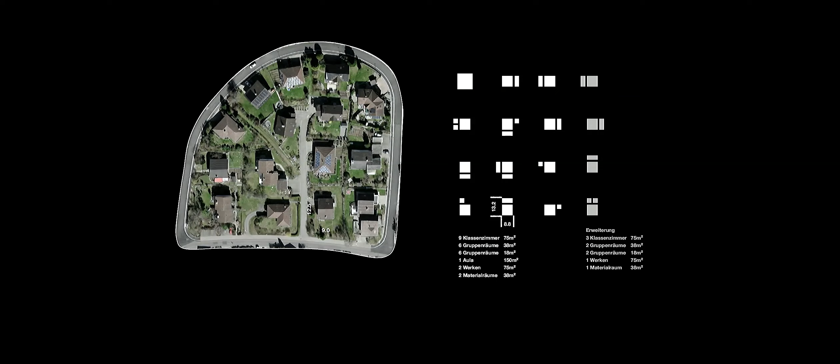This becomes evident in the moment we compare the size of a classroom, being not any different to the size of a one-family home. In good or bad, this form of urbanization was specific enough to build on it.

We therefore started to conceive the program of the schoolhouse as one of the cells, giving particular attention to how to place every single room of the program in relation to one another, as if they were little houses.

After applying all the regulations and criteria about schoolhouses, the layout of the single pieces of program will be as simple as that. Every classroom is oriented toward the outside, never to north, along the periphery, and all the common rooms, such as the sport hall or the workshops, are placed in the center of the village.

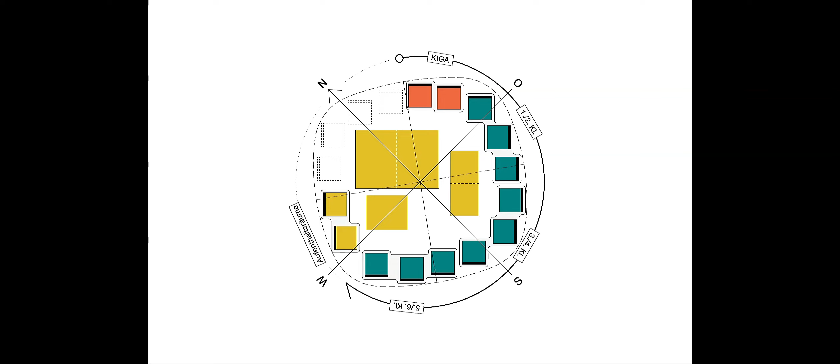As you can see, the arrangement of rooms does not follow obediently a given structure or composition. It is rather the direct consequence of a logic of contained expansion in which every single atom of the molecule finds the most suitable position and orientation.

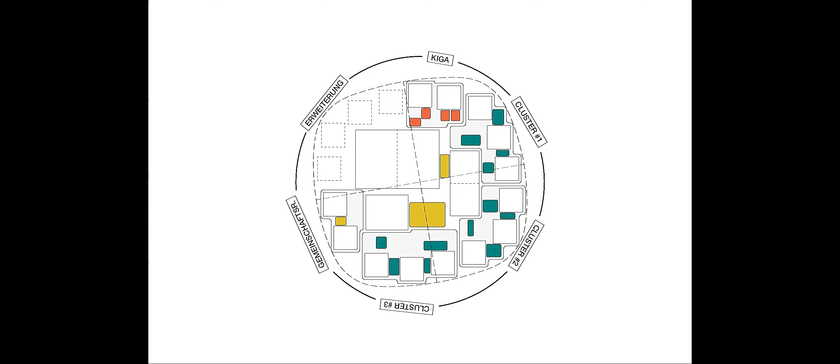So the unorthodox resulting arrangement of the classrooms is not per se the quality we were investing on. We were rather focusing on the in-between spaces that in conventional suburban structures would be used as a garden or a parking plot. And we were interested in how to program them as didactical activities.

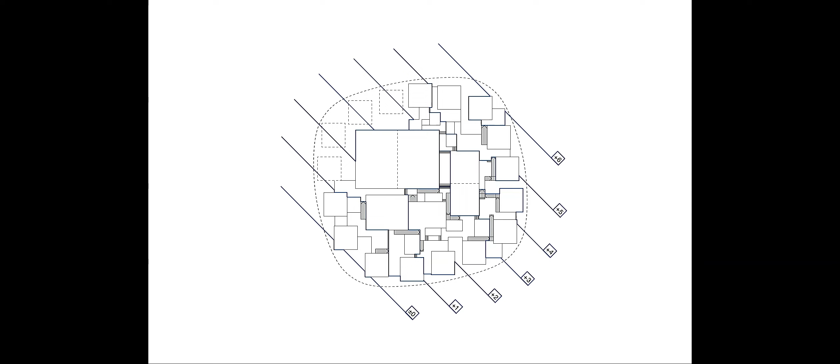The most relevant quality of the ground structure is that it is subordinated to what exists already, in our case, the inclination of the site slope. As you can see, there is more than 6 meters of height difference from one corner to the other. So we needed to figure out a way to move all the kids across the school remaining parallel to the existing terrain.

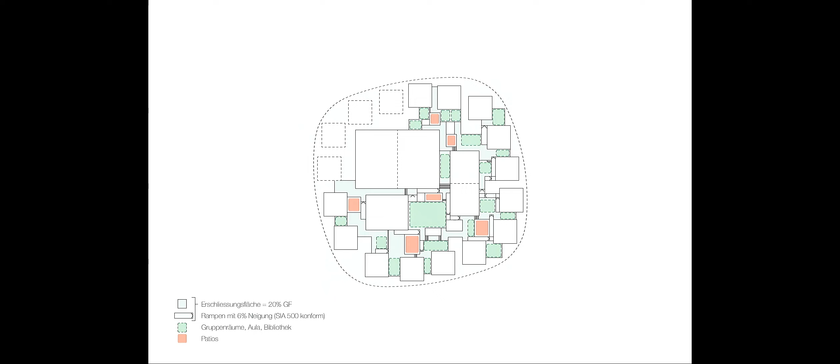We are convinced that such a system of in-between spaces connected by ramps, stairs, and shortcuts following the topography will produce the phenomenology of an animated village, representing an ideal spatial condition for the informal moments of learning that are becoming more and more important in today's pedagogical approach.

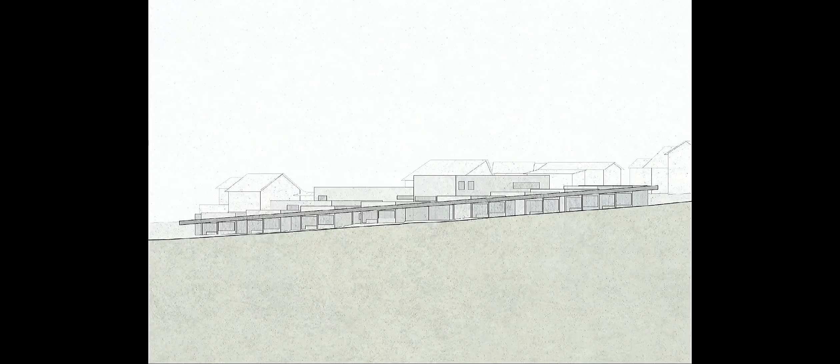To unify the series of elements, so classrooms, corridors, informal learning spaces, etc., we proposed a roof which is as much in dialogue as possible with the topography that crosses the school, an inclined platform perfectly parallel to the abstract slope of the ground.

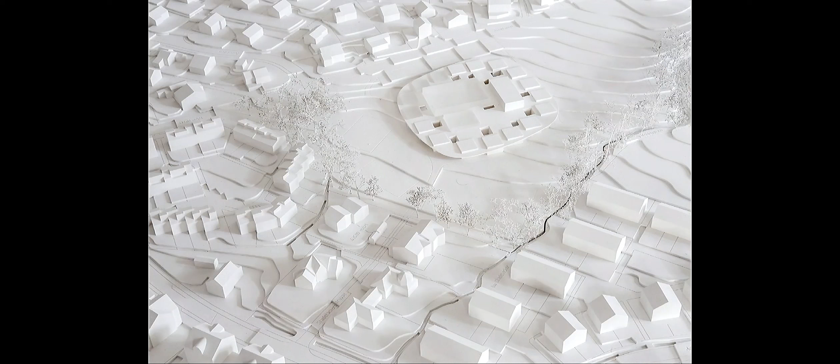As you can see from this aerial view, while the single volumes grouped in the form of a cell appear as an extension of the suburban pattern, from a closer perspective, thanks to the shape of the inclined roof, the new building starts a conversation with the elements of wider scale.

The tree lines following the creek, the main road, the slope. In our perspective, it starts to become a harder piece of the landscape.

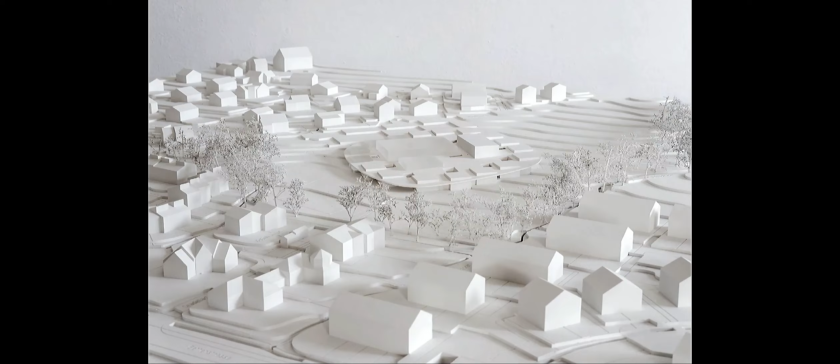Like in a village, you can access the building from different sides without any hierarchy. So every child coming from any direction will find spontaneously his or her entrance, developing a different memory of the main facade of his or her schoolhouse.

What for us is the most important quality of the school is the contrasting spatiality between the sequence of uninterrupted informal learning spaces and the ordinary well-proportioned spaces.

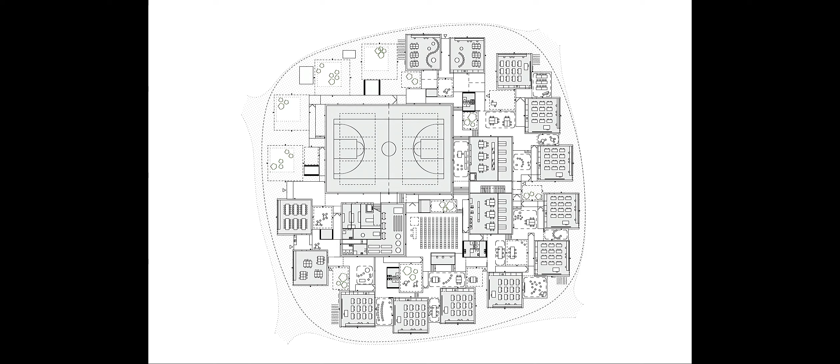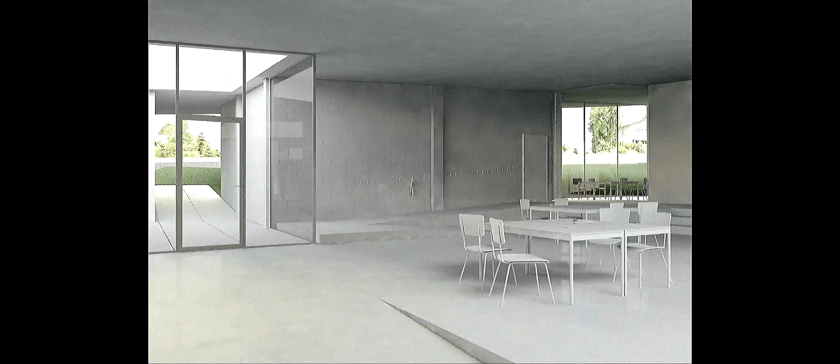The dense pattern of interior spaces, always starting from a small courtyard, as you see here, opens up into a piazza that will be used as a main hall. The open animated spaces are sometimes oriented to the outside and sometimes toward the inside, but always referring strongly to the natural slope that never ceases to be an orientation point.

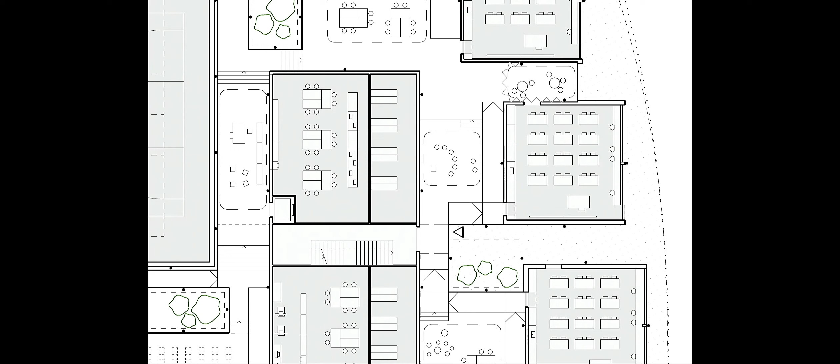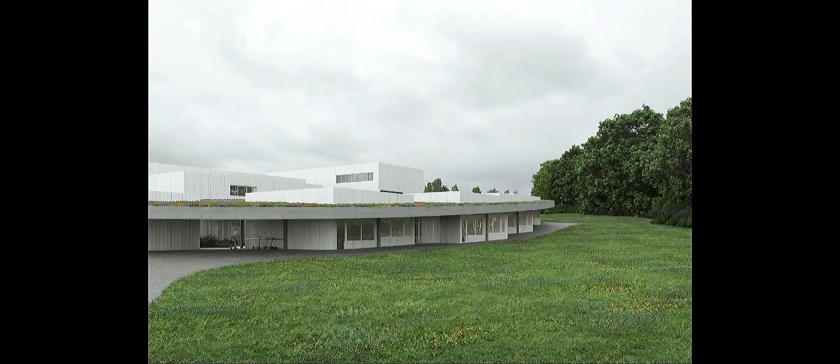During the intermediate discussion, the teachers were enthusiastic and explained to the architects of the jury that the children would have used the ramps or the big step to do their math exercises. They also questioned the very idea of a main entrance, saying that the scholars would have found their own specific path to the classroom. We were very happy to hear that the perception and appropriation of spaces was recognized by the school team as a learning process towards a higher awareness of the child towards his or her environment.

The second declination of circular structure is actually an already existing one, one that we didn't have to design, but rather to simply understand. Some of you may recognize the place. We are on the Gotthard Pass, in the center of Europe.

What we were asked to do is basically to restore this small building here, right next to the old hospice that you may know from the refurbishing project by Miller & Maranta. If the big construction of the hospice would serve as a refuge for people crossing the Alps until the end of the 19th century, the smaller building would do the same for them, the horses.

The actual economical source that, together with the people that would guide them, described the economy of this region. No matter what the weather condition was, the goods needed to go from north to south and from south to north.

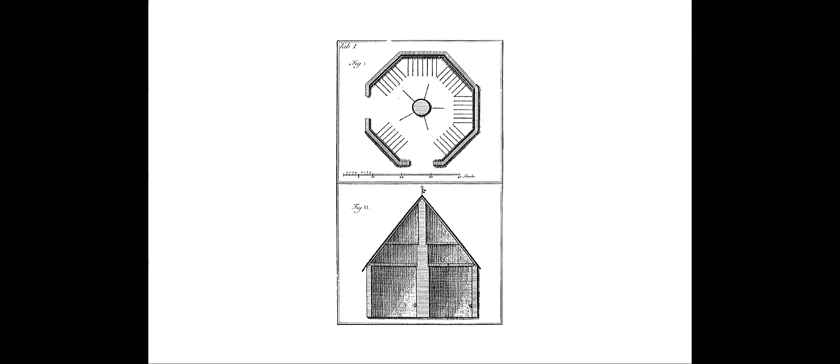The small structure caught the attention of an important figure of the 18th century, Rudolf Schinz, a historian and biologist who at the end of the 18th century received the mandate to describe the entire territory of Switzerland, so he needed to travel across the Gotthard. During his stay on top of the mountain, he drew this octagonal-shaped floor plan at the ground floor and its section. What is peculiar is that it's one of the few buildings that he would draw in his journey, and he also gives a very precise description of the detailed positioning of the 47 horses that would stay within the building.

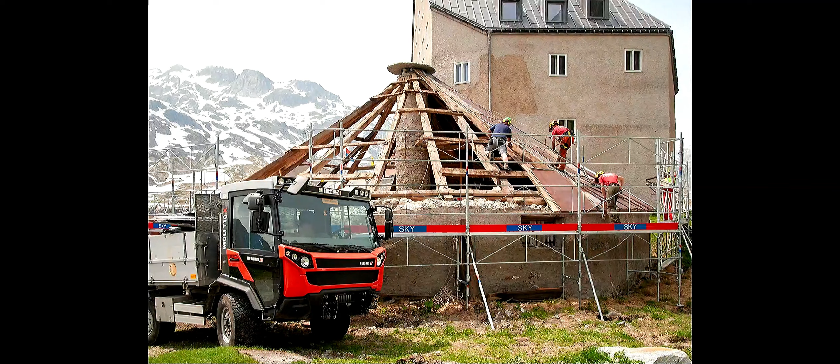If on the one hand it was relatively easy to trace the substance that composes the object - the octagonal stone wall at the bottom, the central 7.5 meter high column, and the original structure made of wooden, large beams, and the iron sheets covered in rust, almost more rust than metal, placed at the beginning of the 20th century - on the other hand, it seemed very difficult, if not impossible, to reconstruct the reasons that led to the construction of such a profane building. You must imagine the smell that it was inside, in such a pure form, the octagon.

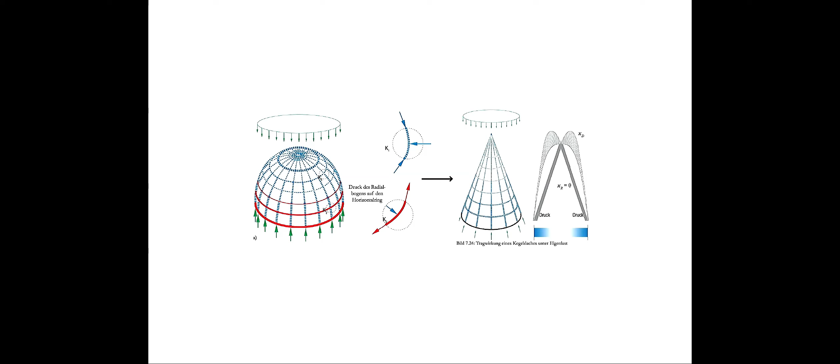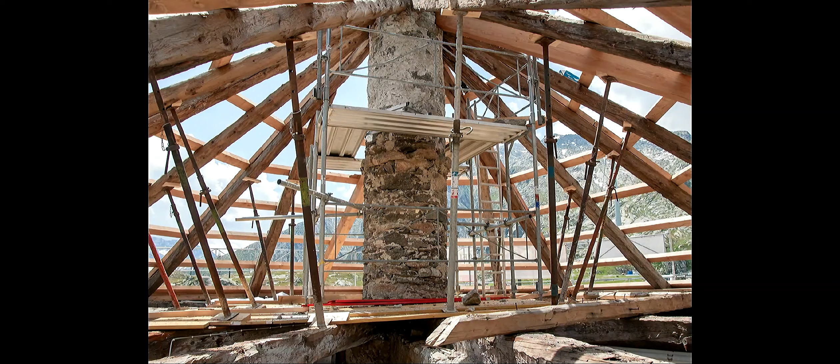The first steps were the restoration of the main radial carpentry and the substitution of the perimetral rings that were not to be saved. Only in the moment in which the structure was completed, or recompleted, would the building reflect its inner logic within such a monumental landscape.

We weren't actually sure if we were building the object or just the inner skin of that beautiful landscape. The only element that we inserted as a new element was what it was in the existing building, the weakest point, which is the traction ring that transmitted the forces of the roof to the wall - which we did out of concrete, or substituted out of concrete. And of course, you see from the detail that the new roof would be a ventilated roof.

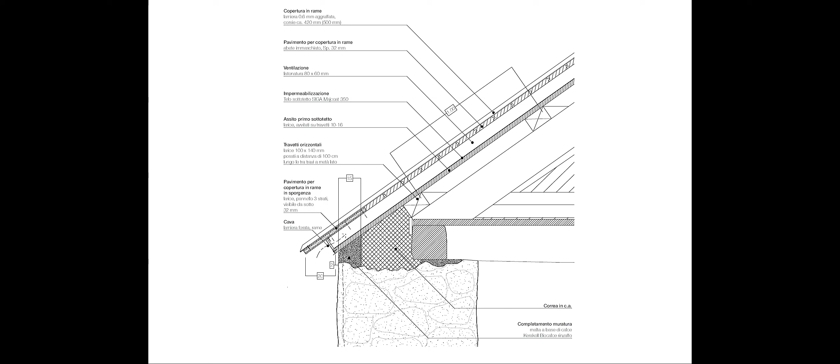On this drawing, you see all the pieces of the roof structure that come together in an irregular yet radial way. And I want to point out the irregularities because we think they are very important to understand such structure.

For example, this triangle is quite ideal - it has the two longer sides, and then the middle one. And this one, for example, starts with two: one goes to the top, and the other goes to the intermediate beam. So it's always a dialogue between pragmatism and reaction to the structure.

This drawing has been, let's say, the most important drawing to design the outer skin. Could be unlogical, but what we wanted to do is that this system would somehow transmit the same logic to the outer skin that you see in this drawing. And that's why, for example, we reduced the width of the metal plates to just 42 centimeters, and positioned them in relation to the longer side of the triangles, not in relation to the base as you would do in a normal metal roof.

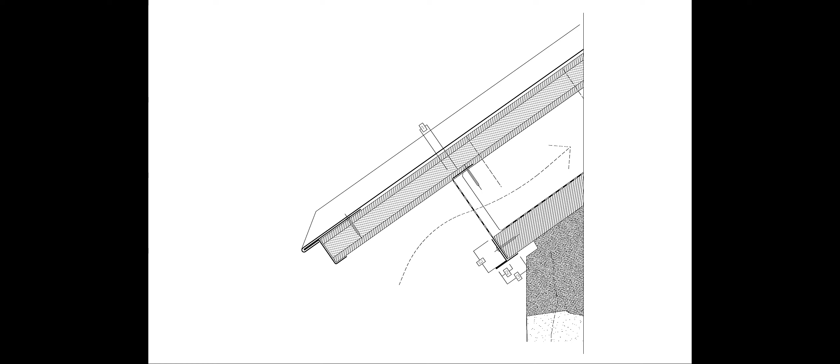This is why we worked basically only on this scale, this 1:5, 1:2 scale. And we were basically trying to disassemble the single layers of the new roof so that it was possible to keep the minimum thickness that you would see as an abstract, sharp line that determines the appearance of the building.

Here you see the alternated layers of larch boards and copper presented, in an understandable way, in a direct way. You see how they are oriented, you see the role they have, and so on.

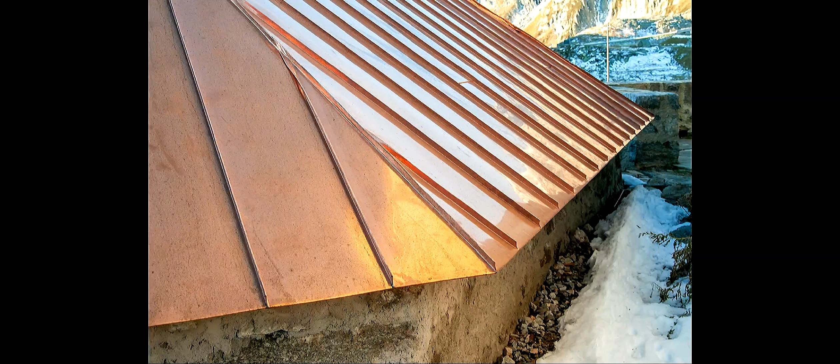And in order to reinforce the monolithic quality of the roof, we absolutely wanted to construct the folding line between the single sides in the exact same way as the joint between the parallel elements, which is not that easy. You have two plates that come together in 4 layers of metal, and at these points you join, at a certain point, 8 layers of metal that you have to fold together by hand.

And this wheel or umbrella structure is not only, let's say, pressed on the outer skin, but is also reflected as much in the interior structure of the intermediate slab. The partition walls and the beams all converge towards the central column. And what fascinated us and what we wanted to preserve is that each fragment of the space carries the traces of the exact relation between all parts and this kind of central structure.

And the understanding of the overall structure was indispensable. You could also say you just looked at it, but it was indispensable for the insertion of the new element, which is the stair that leads to the first floor.

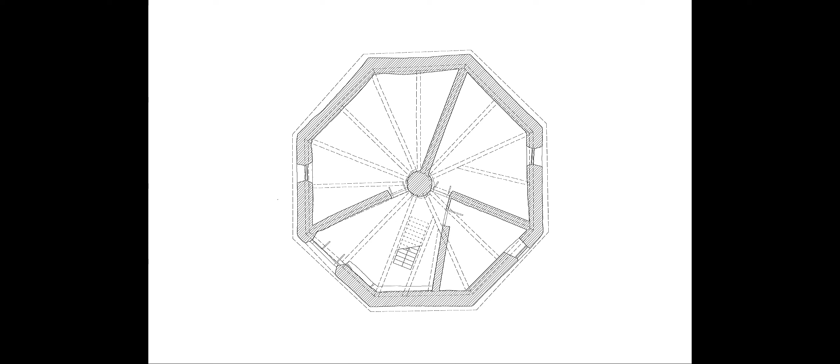In restoration projects, architects are usually interested in what really changes, typologically or visually or whatever. And we were also incredibly fascinated by what is just substituted. Substituted in the sense that you change everything by keeping the same logic. Like the example of the floor boards of the first floor.

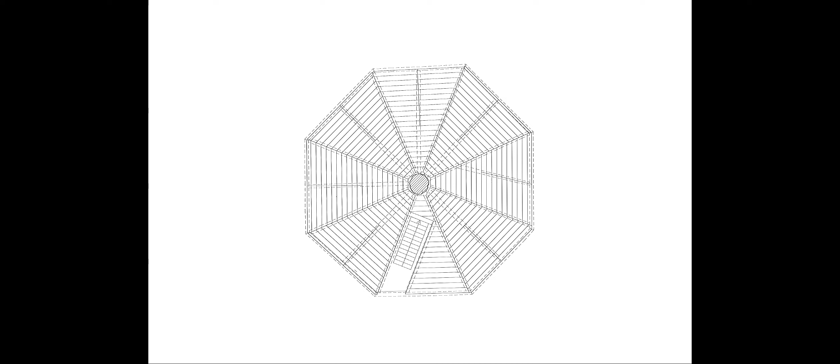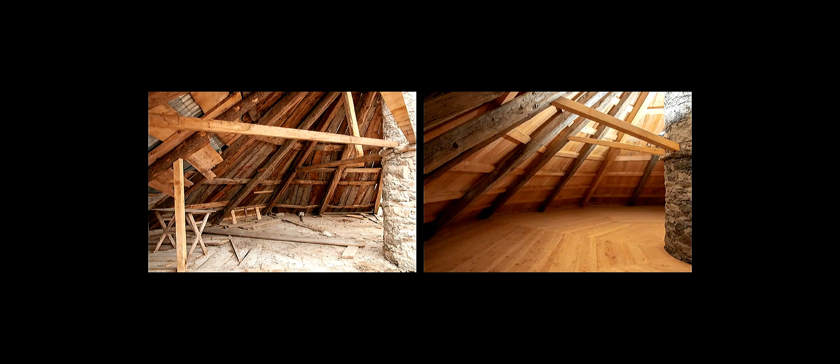And even though the majority of the material has been substituted, the central constructive logic, the geometrical perception of space, and most importantly, the relationship between each piece was kept intact. We were happy in the end because we didn't change the building in its main qualities. For us, it was enough to make visible the constructive, geometrical, and spatial coherence of this simple yet transcending structure.

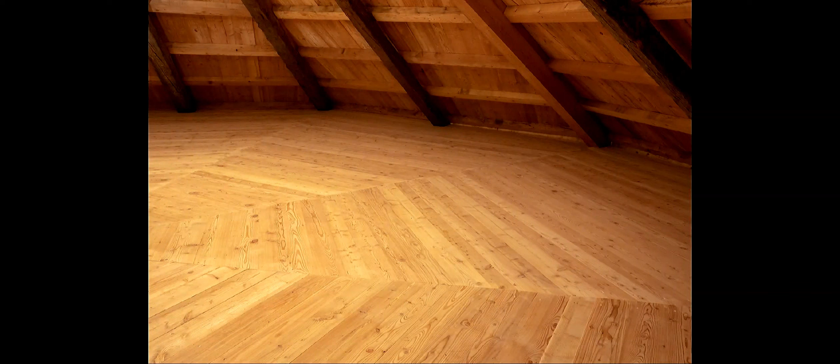This becomes even more important when, for example, even looking at a fragment of it, you still comprehend the entire construction. We are fascinated by the fact that even if you don't see the center of the structure, you can precisely say where it is, how high it is, and what is the role of this center within the construction. And we love the fact that in the end, this metal roof, this striped metal roof, somehow reminds the joints of the boarding that you see in the inside of the space and that are oriented in the exact same direction.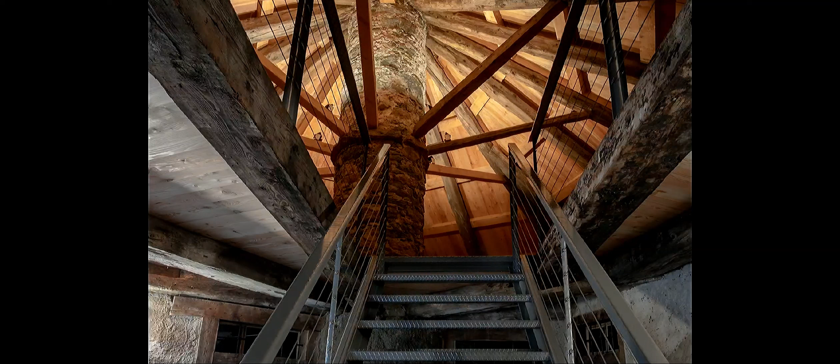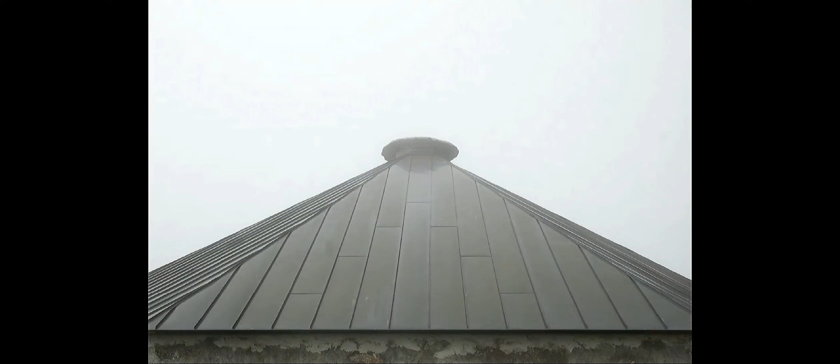As last impressions, we want to share the tribute dedicated to this column that we want to be perceivable in the total height, in the interior space, and that where every element of construction converges.

The next application of the circle and its intrinsic principle is a competition project for a bus depot and workshops in Riazzino. As you know, everywhere public transport is gaining more and more importance, and with it the need for new infrastructure. But the scarcity of the resource ground makes every square centimeter very precious to park the vehicles, to repair them, and so on.

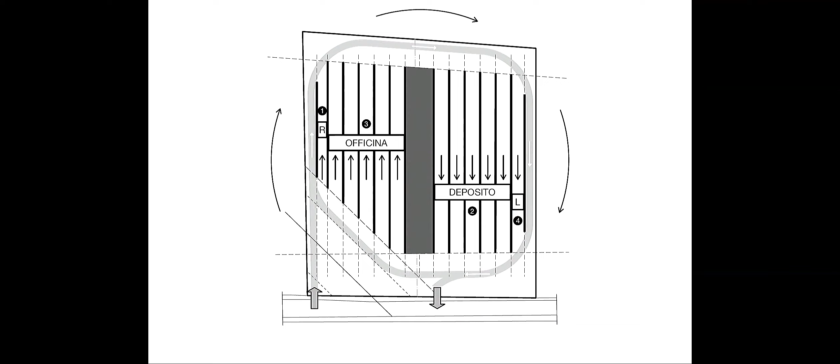We therefore analyze the plot under the perspective of the flows with the aim to identify the highest number of parking spots for buses. Besides conventional building restrictions such as maximum height or area ratio, the main criteria for such an exercise is the steering radius of the vehicles. So we try to make the path of the buses as efficient as possible, and due to the geometry of the site, the circle was by far the most efficient.

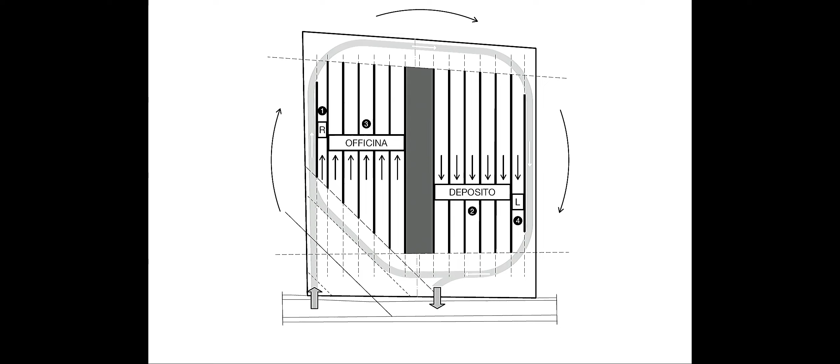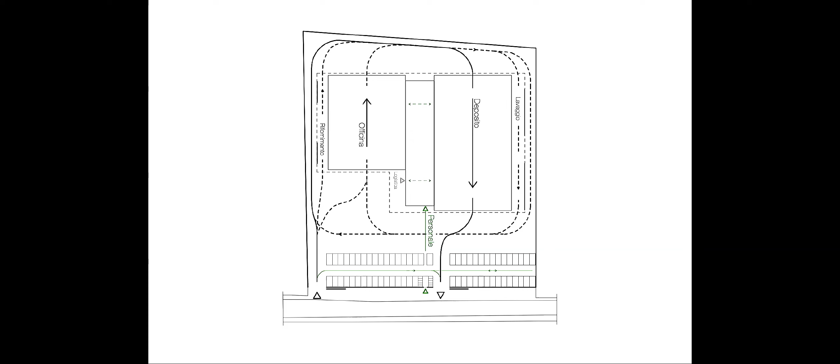So the most efficient way to drive around the building gives shape to the building itself. You can see that on the left side, the buses will drive in the workshop from the bottom and exit from the top. On the right side, the buses enter the depot from the top, and in the morning, once they run out all together very quickly, they are already directed towards the street. The building is nothing else than a device to direct the circular movement of the buses.

This becomes evident in the proportion of the central volume that hosts the storage, the changing rooms, and the administration. Its dimension is given by the steering radius that a bus parked in the last lane of the workshop needs to drive to park in the first line of the bus depot. So from every point, a bus is able to drive from one sector to the other.

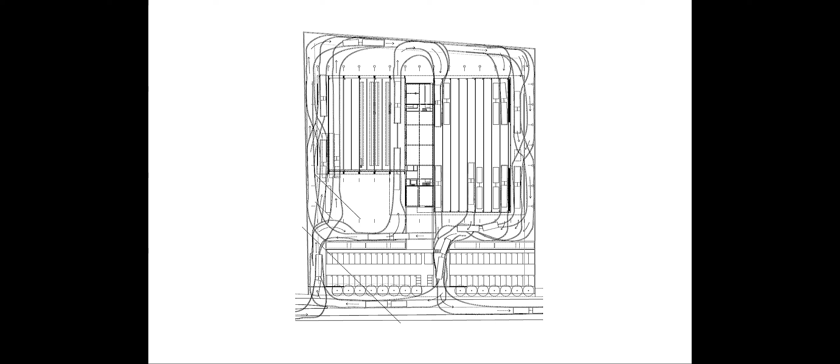Now we zoom in on the floor plan of the building, which is basically a one-floor building with a symmetrical arrangement around the central volume.

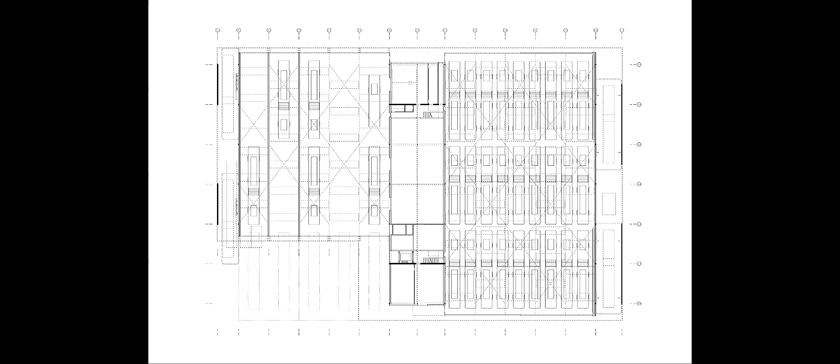For the movement of the buses, it's very important that both the facade of entrance and exit and the space of parking are free from any statical elements, such as a column or a wall. This allows both an undisturbed drive within the building and the maximum flexibility to transform the workshop into depot and vice versa. This is possible when you span the roof in the opposite direction of circulation.

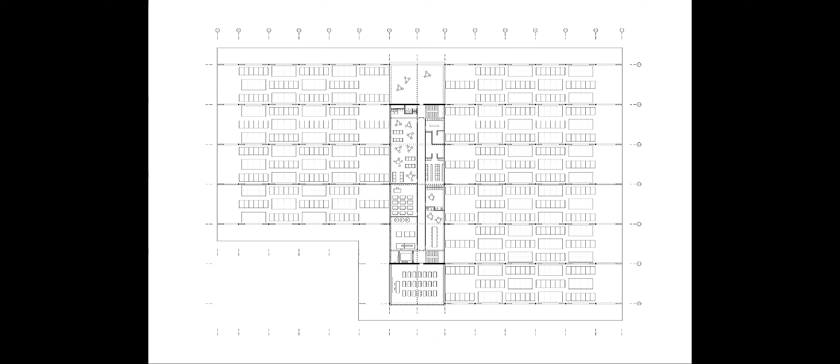The very primitive system of load-bearing elements is ordered in independent rows that span from one side to the center and over to the other side. We didn't have particular ambition in the geometry of the structure. We just wanted it to be as light and dense as possible. We were actually very frustrated because we couldn't find anything light and dense enough within the realm of architecture.

So the turning moment was when our engineer Luca Pizzetti explained to us the analogy between the bus depot and this model of an Austrian monoplane from World War I. A structure marked by covering wings provided with compression elements and a web of cables carrying the pressure of the air to the central body.

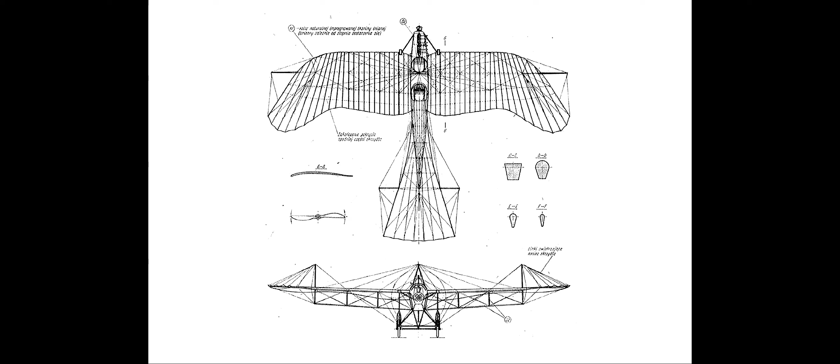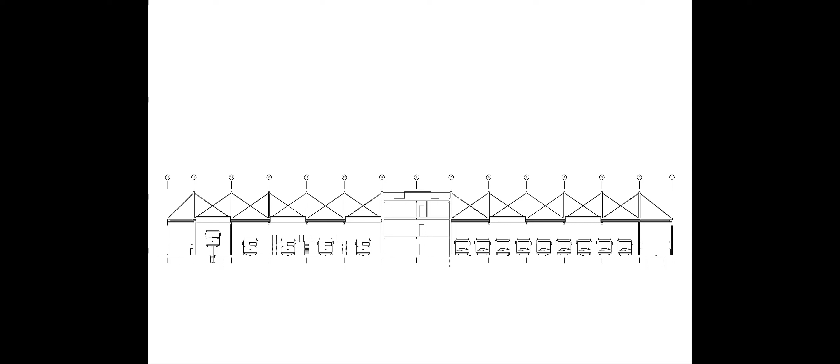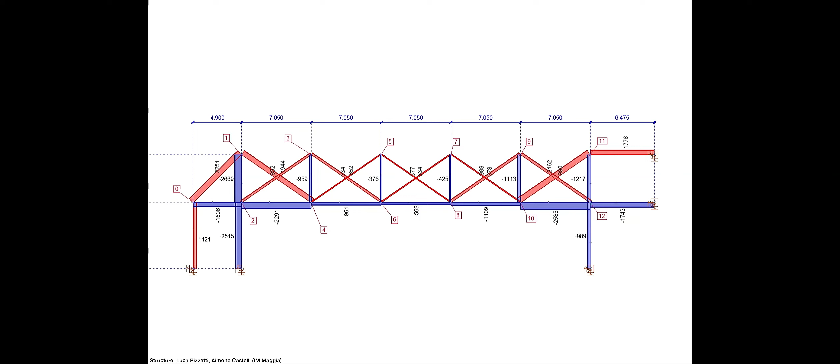We transferred the same logic to the roof of the bus depot. The only compression elements are the actual roof and the short vertical pillars on the roof. Everything else is as thin as a traction cable. The peculiarity of this system that makes it different from a common truss system is that it needs to be spanned on the side, somehow like a tent. If you don't span it from the side, it collapses on itself.

So in order to reveal this specificity, somehow also its fragility, we decided to collect the forces of every row into one hanging beam. This element spans along the entire length of the building and is pulled to the ground by two couples of concrete walls that are at the same time a protection against the rain for the refuel and washing row.

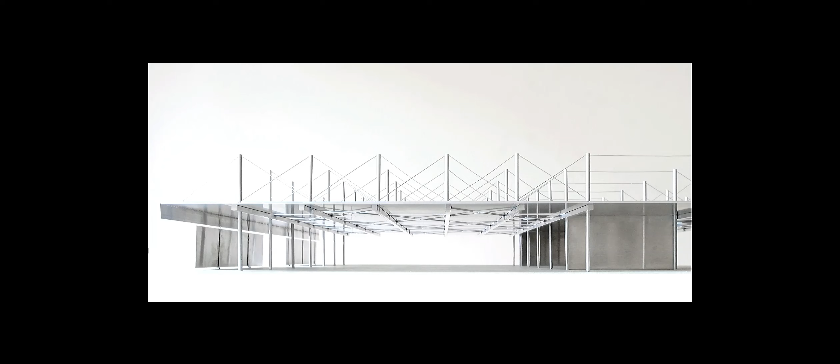All pieces are therefore connected into one structure that is as light as possible, almost inexplicably suspended over the ground. Spanning the entire structure above and around this vast space provides the necessary stiffness to the fragile paper-like roof that covers it.

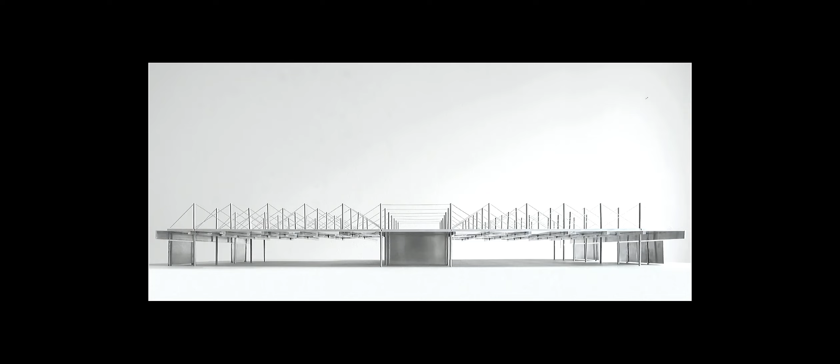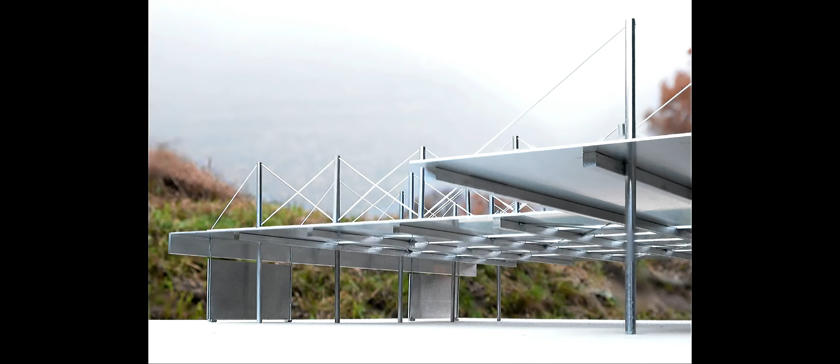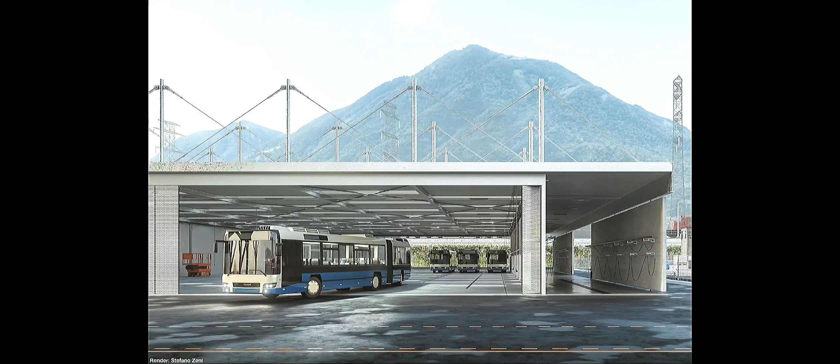In this sense, our proposal can be understood as the amplification and densification of already existing elements. We wanted to pay a tribute to the infrastructure that powers our cities. Applying and declining the principle of a circle and its flows, we were able to offer 30% more bus spots than they thought possible to fit in the plot.

A particularly exposed site where just by moving a couple of meters on the left or right side, you would open different views to the valley or to the opposite directions. So somehow unexpectedly from a sloped side, we couldn't identify a main orientation. Normally you look either to the mountain or to the valley, and in this case there was not such a main orientation, but rather an exposure in all directions.

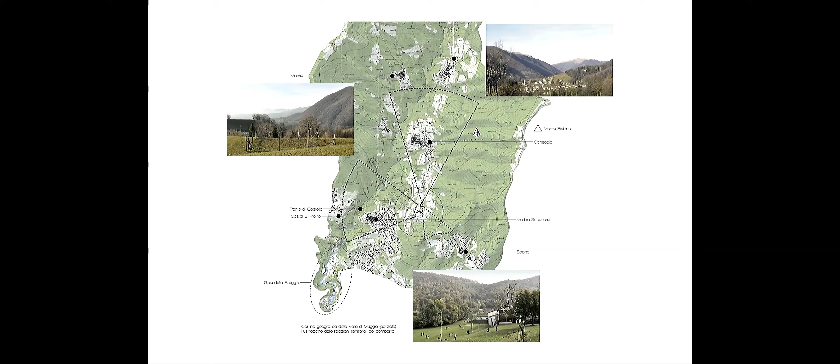In other words, it was the perfect place to place the playground for the kindergarten. It was simply missing one thing, the fence, to enclose the kids. It was clear that the building would need primarily, first of all, a fence before being a building. And in order to collect in a shape the playground.

We decided to build this fence with the help of the service rooms that were asked by the program, such as restrooms, storage, and meeting rooms that we translated in these barrel-like volumes. This ring that would build the fence of the playground would also act as an inner support for a roof construction made of radial wooden beams, spanning from the fence to an outer perimeter wall enclosing all the activities of the kindergarten.

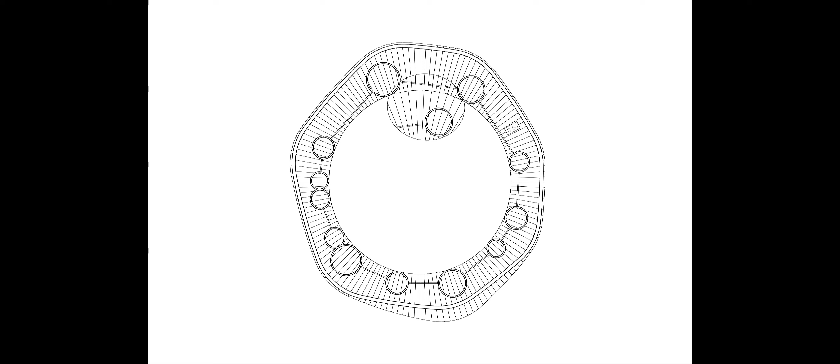It is a kindergarten for 2 classes, and this made it possible to organize all the spaces without a distribution, actually only thinking it in a specular way. At the head and tail, you would have the common rooms and the entrances, and like rings of a chain, the single functions of each class would be connected together on a continuous path on the right side and left side.

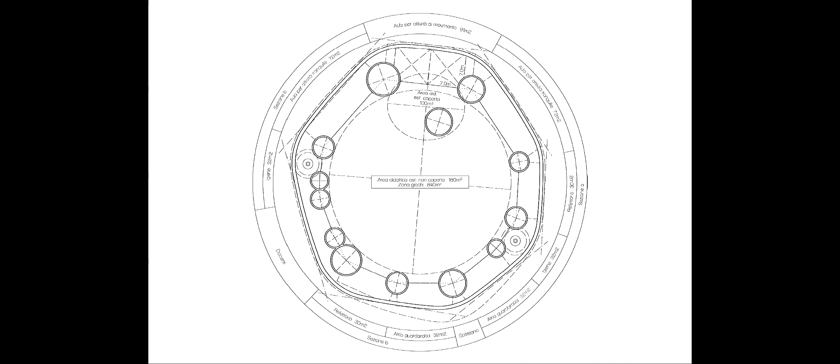If from an organizational point of view, the 2 classes are almost identical, their development in heights follow the opposite movement, climbing or descending the waved slope through gentle ramps on the right side, that are these symbols, or through stairs on the left side.

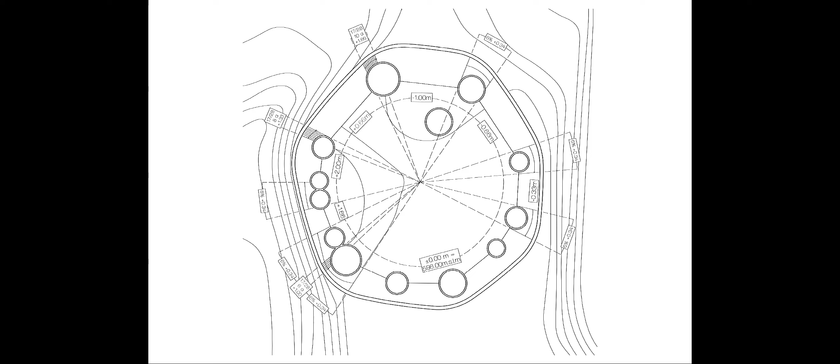Despite the primitive intent to enclose in the simplest way the playground with a circular fence, we were more interested in deforming it or contaminating it, this very pure gesture, with the richness of the site. Richness that we identified also in this corrugated grass slope, manifestation of the palimpsest written by the never-ending negotiation between geology and human activity.

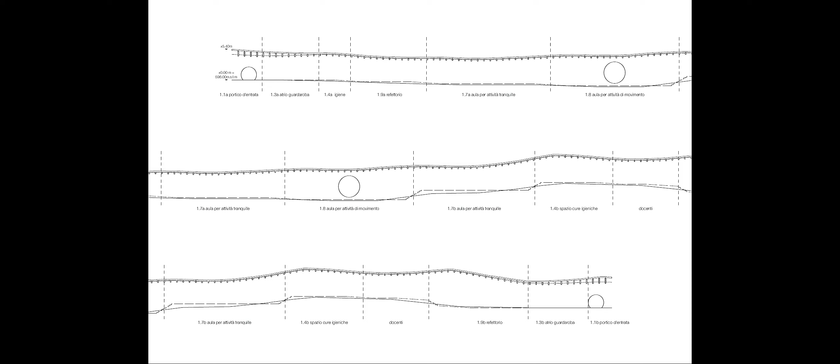The drawing that reveals this contamination the most is surely the development of the facade, that reveals the consequences of disturbing the circular facade with the topography. What we liked is that the morbid shape of the building would let, at least in our eyes, let this ground literally untouched or going through the building, even if it was covered by it.

Somehow also following a similar logic to the existing primary school that was already built in the 70s, that is somehow sometimes elevated from the ground, sometimes follows different levels. There was another aspect that we borrowed from that existing building and that we adopted in our proposal, and that is the shed roof, the single shed roof. And we adopted it in the exact same inclination.

You know, there was no reason to change, and we decided to orient it towards the center of the playground. For us, it was important somehow that when you are in the playground, thanks to the inclination of the roof, your view would be somehow directed towards the opposing mountains and not to the building itself. This is the principle of a fence that contains, but is somehow transparent.

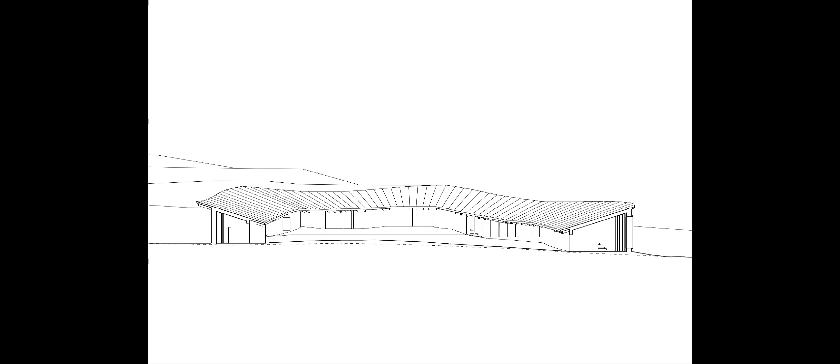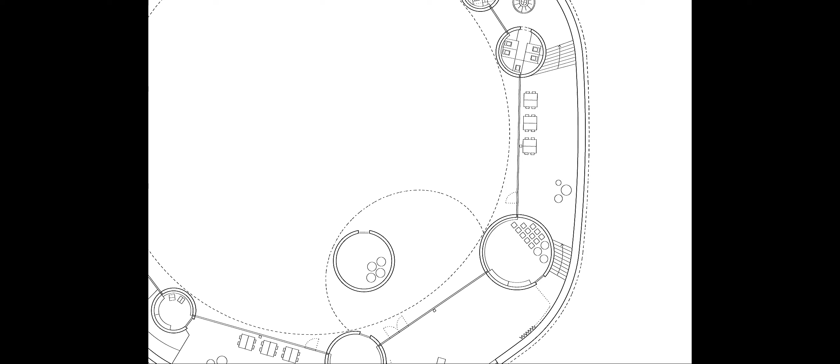But the resulting architectural quality of the inside spaces actually interested us even more, because the continuous sequence of spaces of the kindergarten, we wanted them to have a great ambivalence. In particular, we wanted that on one side, it takes the shape of, let's say, what we called a bent enfilade along the peripheral wall, where singular spaces are connected to one another along this wall, suggesting the sense of continuity, of never-ending sequence of rooms.

On the other side, we wanted to feel in the space, transversally exposed in front of the open facade spanned between the cylindrical service volumes.

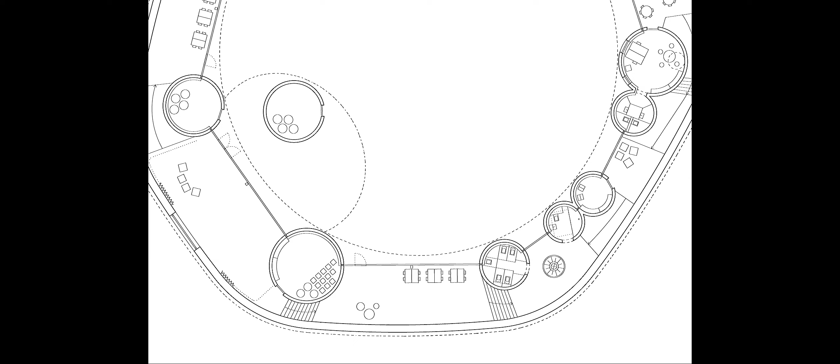Our expectation would be to feel at the same time a concentric extension of this playground, and at the same time feel protected in this architectural ring that defines it. And this would be the resulting floor plan of the project.